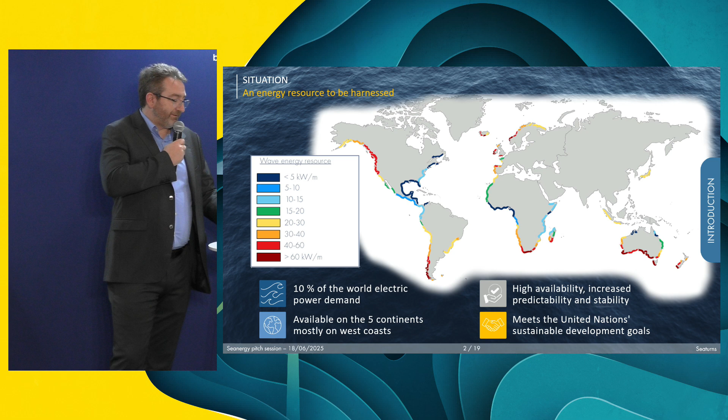So this energy is to be harnessed. And SEATURNS offers a solution to harness this energy. We developed a very simple and robust solution designed to withstand the harsher conditions at sea. We'll provide this solution to produce a low carbon and low cost energy and to be in phase with the climate and environmental imperatives. And we plan to become a major player in the world of wave energy. We've deposited 3 patents. We are a French startup based in Bordeaux.

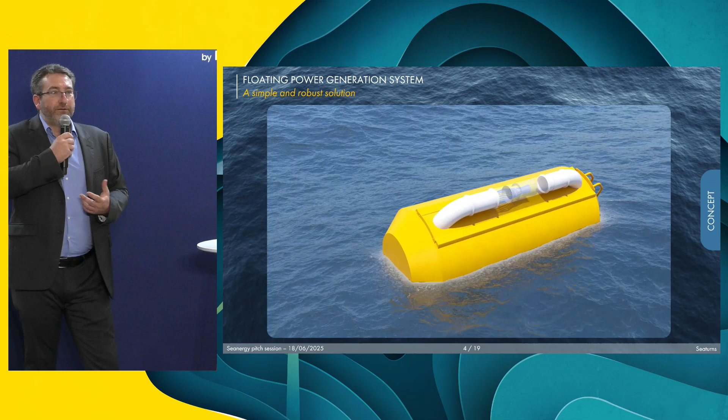This is our solution. This cylindrical floater will rotate in the waves. This pitching movement will be transmitted to an inner water pendulum. You can see here, and this solution will create an inner circulation of air. This flux, in closed circuit, will rotate an air turbine coupled to a generator that will produce electricity.

This solution is very compact. There are no moving parts outside the floater. It is all in this sealed volume. Thanks to the mooring solution, we create this oscillating movement. This is one of the crucial patents.

One advantage of the solution is the possibility to be installed in a multi-floaters configuration. As you can see here, a typical line of 10 floaters will produce 2 megawatts of rated power. But our ambition is to create larger farms. I'll introduce you the market later. So simple, robust, the possibility to be installed in a large number of places in the world and places where there is a huge electricity potential.

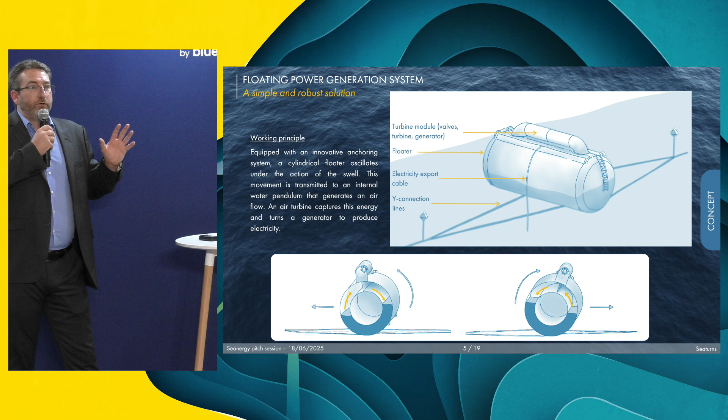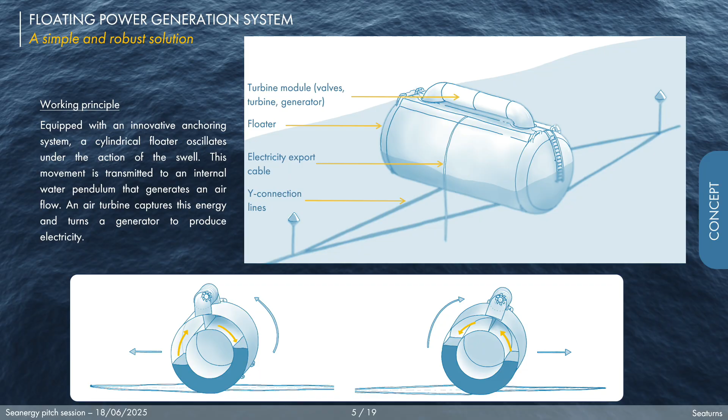This is just a reminder to explain the operating principle. So you can see here this inner water pendulum inside the floater, the air turbine, the generator, and we have a solution to export electricity thanks to a very specific export cable designed to, in particular, withstand fatigue.

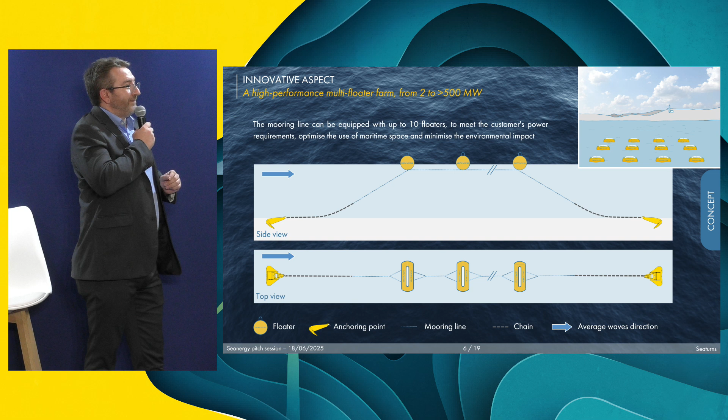And on the next slide, this multi-floater configuration with a typical mooring solution. So our innovation is in the floater, not in the moorings. And this is also a key point. I mean, to be able to face the strongest sea conditions, we need only a good mooring design. The floater by itself is very simple and robust.

Just maybe a word. A typical project would be to install a line of 10 floaters with a water depth of 20 to 30 meters and a typical distance from the shore of, I would say, 2 or 3 kilometers. Not too close because of visual impact, not too far because the cost of the electric cable could increase too much in the budget.

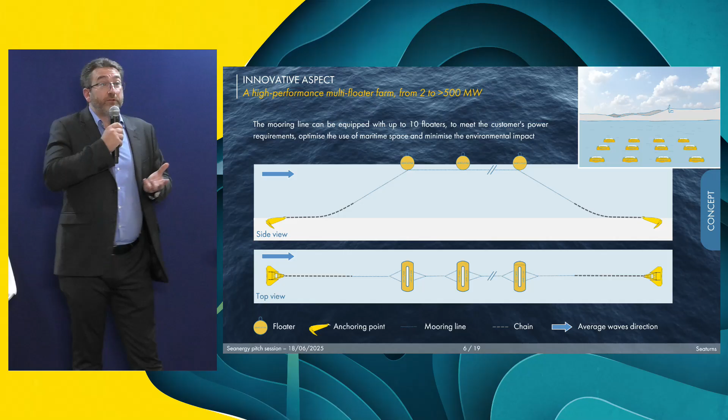One particularity based on this multi-floater configuration is the possibility to install a large power on a small surface. I mean, if you consider 1 square kilometer at sea, we can install 45 megawatts. This is 2 or 3 times bigger than offshore wind turbines, for example. So a reduced marine footprint or a bigger power for the same surface at sea.

This is a summary of several advantages of the technology. I already explained nearly everything. Simple, robust, similar to the robustness of a buoy at sea. Possibility to install several floaters, so optimization of the cost of the capex, and higher power for a smaller surface.

Another advantage is a very, very good weight to power ratio. I mean, for the same weight, and I didn't mention the fact that the floater is steel made, we can produce higher power. This is a good competitiveness indicator. Our test basins showed a very good performance on a very large operating spectrum.

This means that we can install our solution on a very large number of locations worldwide. From the beginning, we followed a very strategic approach based on technical performance, but also economic performance. I mean, if our solution has good performance but costs too much, this solution would not be developed much.

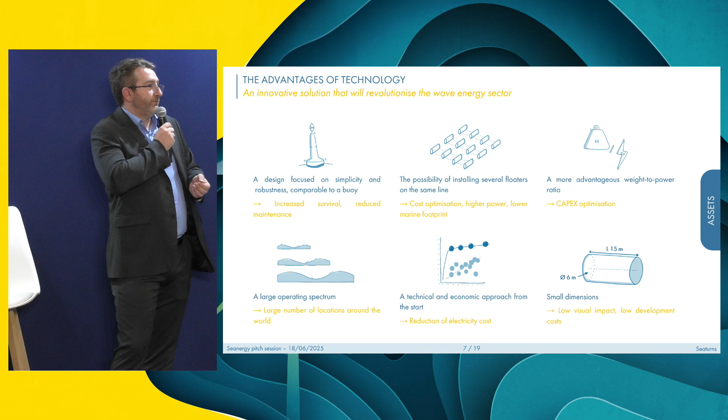And finally, the dimensions: 6 meters diameter, 15 meters long, for 200 kilowatts. This device is not so big, and the consequence is that the visual impact will be quite limited.

One major success recently is the possibility to test our solution at sea. There is before and after, it's not the same. I mean, the possibility to test a prototype at 1/4 scale at sea during more than 1 year is a major step for a technology developer.

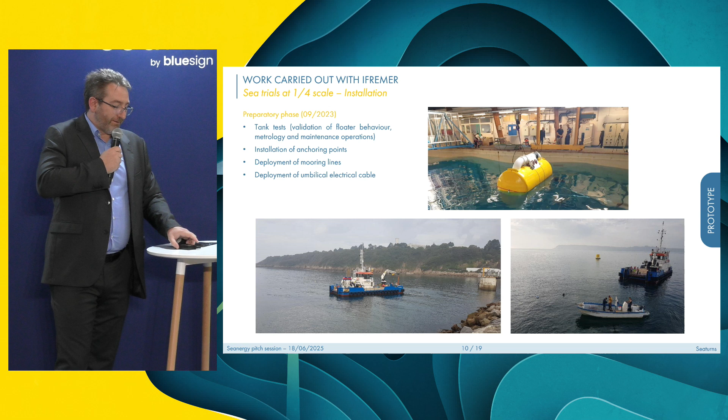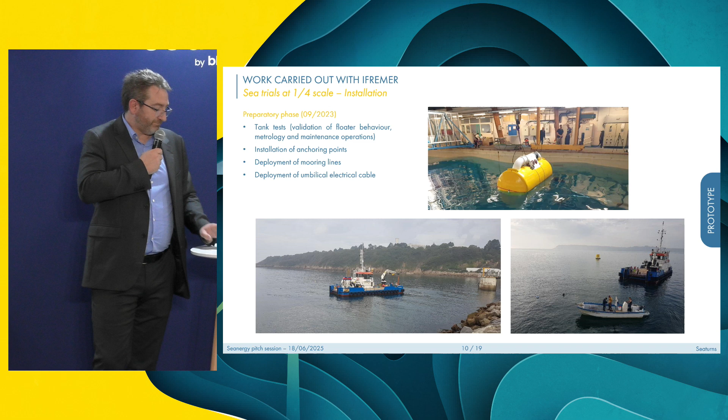Okay, those are a few pictures about those sea trials. You can see here the preparatory phase. We conducted tank tests just before the installation at sea, and then we installed the mooring lines, the dead weights as anchor solution, and then we could deploy the device with those very light means. Several steps: the sea launch, then we filled the cylinder with a water pendulum.

At this scale, the cylinder is 1.5 meters diameter, 3.6 meters long, and there are more than 2 tons of water inside. And we installed the device. It faced several storms. We had good monitoring of performance and images at any time, day or night. And we faced, in particular, this very famous storm in Brittany called Ciarán in November 2023, and there was no consequence for the floater. Good behavior, good performance, good monitoring of performance. So a very good success for us.

Now we move on to the next phase. We are ready to build a full-scale demonstrator. You can see here our solution. It is a 200 kilowatt rated power unit. The dimensions, 6 meters diameter, is roughly the size of this roof, and nearly 15 meters long. You see here in yellow the floater. It is steel made and nothing else. Only steel, no moving parts, no electronic parts.

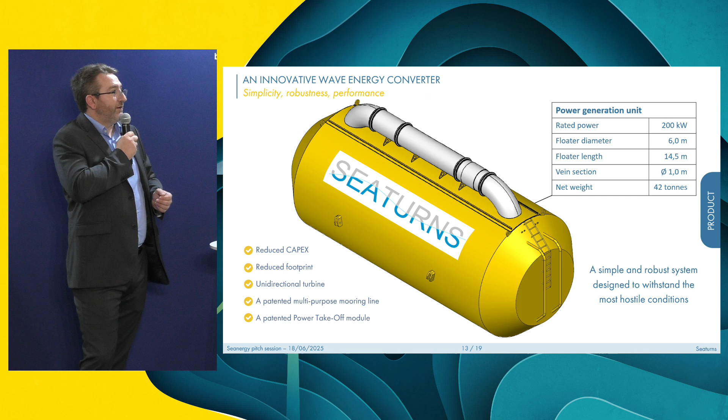This device, this concept, is based on several patents. We today have 3 patents, in particular for the power takeoff.

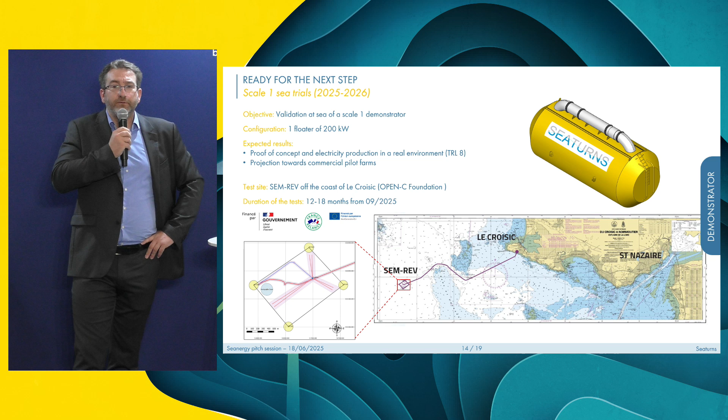The manufacturing of this demonstrator is nearly completed, and it will be installed from this summer, probably August or September, at sea in a testing site called SEM-REV. It is operated by Fondation OPEN-C, located about 20 kilometers from the shore of Le Croisic, and will test a single floater for more than 1 year, probably 1 year and a half. And the objective is to reach TRL 8 and to offer good projection toward commercial pilot farms. This is also a major objective today.

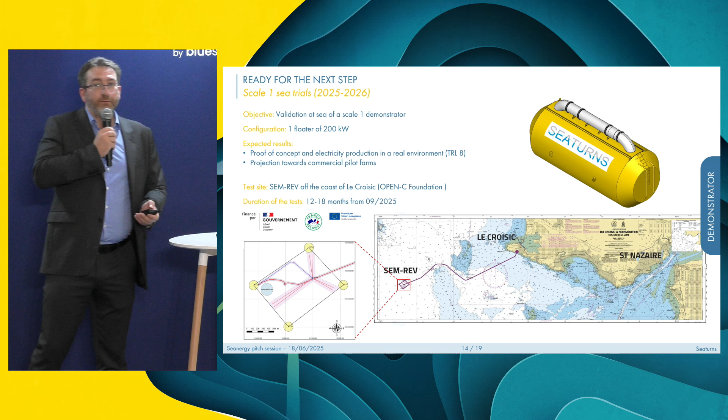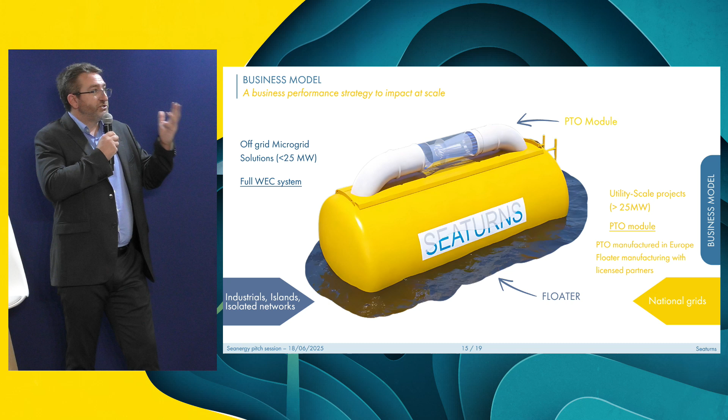So the PTO module will be the key component of SEATURNS technology and we'll focus on the performance of this module in order to install large utility-scale projects with power larger than 25 megawatts. This solution will supply electricity to several activity sectors, isolated networks and islands, and maybe tourism on the short term.

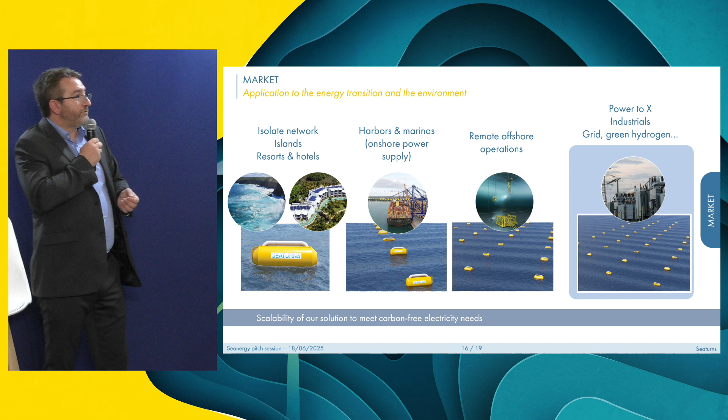But the objective is to quickly move to a larger market, that of grid electricity, green hydrogen, power to X, remote offshore operations, harbors, marinas, etc. This electricity will then be produced by larger farms, larger wave farms.

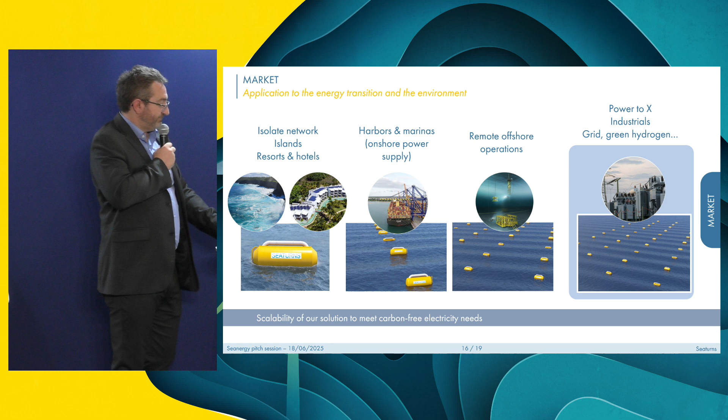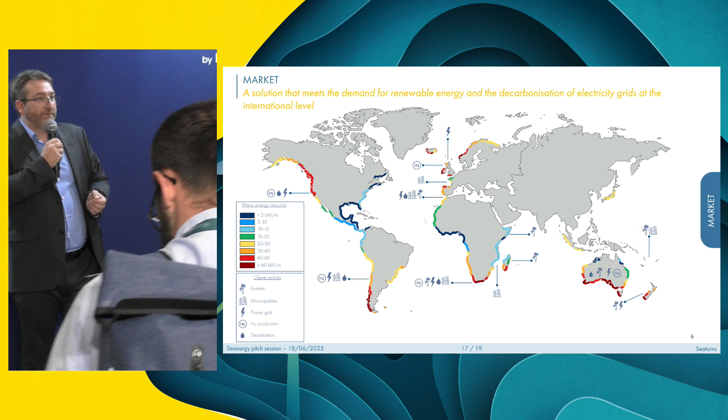I already showed this map, but I wanted to show it again in order to explain that there is a huge market, a huge potential available everywhere. We'll focus on the western coast of Europe, on the south of Africa, Indian Ocean, Australia, Oceania, on USA, Canada, Chile. But there are also possibilities in other places because our solution could be competitive even in smaller sites with maybe a smaller value of wave energy.

But in this case, the solution might be competitive. It will depend on the resource available on this site. So please don't hesitate to come and meet us. We can discuss future projects.

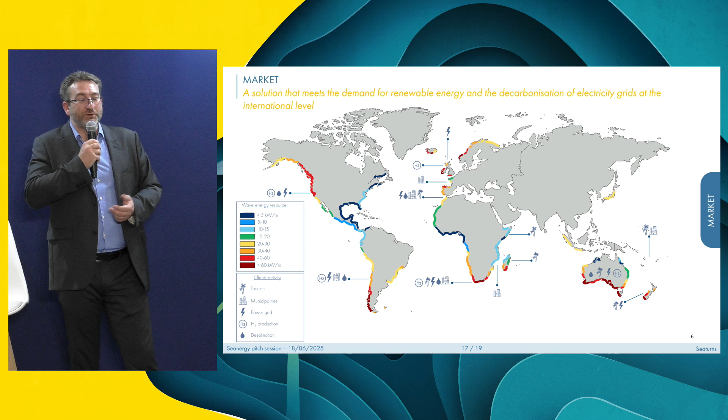The future will be based on the installation of several pilot farms. We are currently working on the demonstration at full scale, and then from 2026 or 2027, we'll install the first wave pilot farms. We are currently discussing with some partners, and the objective is to deploy those farms as soon as possible. The idea is to show that, yes, there is a good potential with wave energy, and we want to complete this demonstration as soon as possible.

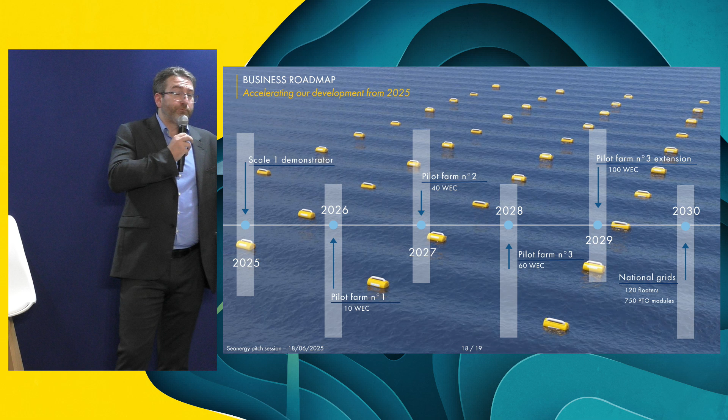It could be in the Indian Ocean, it could be in Europe, maybe in France, it could be in Ireland. There are many interesting sites, and we are ready to deploy this solution. On the longer term, after the wave pilot farm, we'll focus in particular on national grids and this very specific business model based on the manufacturing of floaters close to the future operational sites and the manufacturing of the PTO, power takeoff module.

To conclude this presentation, we are currently looking for clients, of course, local authorities, ports, industrials. Please don't hesitate. And we are also looking for players in the value chain. And of course, if you want to know more about the solution, if you could be a technical partner or a financial partner, we are here at the booth C13 in the Nouvelle-Aquitaine region. Marie is here, Vincent is here, I'm here. So I was very happy to introduce SEATURNS, its technology, and its huge potential.